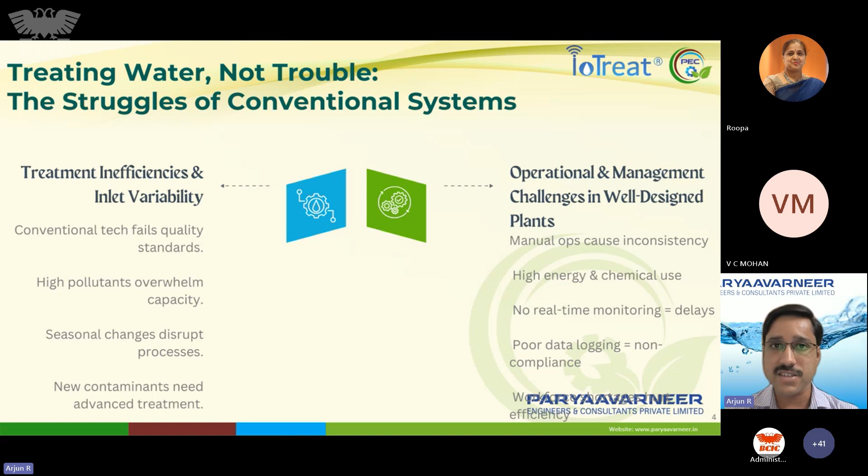So we have a lot of advanced water and wastewater treatment technologies available in the market, which are already well proven and established in many industries. There are a lot of industries already implementing most of these advanced treatment technologies, but there is a very big scope for plenty of other industries to join this as well.

Some of the technologies available are membrane-based treatment, with respect to reverse osmosis, ultrafiltration, nanofiltration, RO, MBR - all these options are available under membrane treatment systems. We have advanced oxidation processes, in which ozonation, UV peroxide, and Fenton process are available. ZLD technology, which is a very hot topic today, as a lot of industries or industrial regions are compelled to achieve zero liquid discharge from their premises. There are many proven ZLD technologies available, like MEE, MVR, LTE, or TVR. We also have application-oriented technologies, like seawater reverse osmosis, which is very much essential for coastal industrial belts like Chennai.

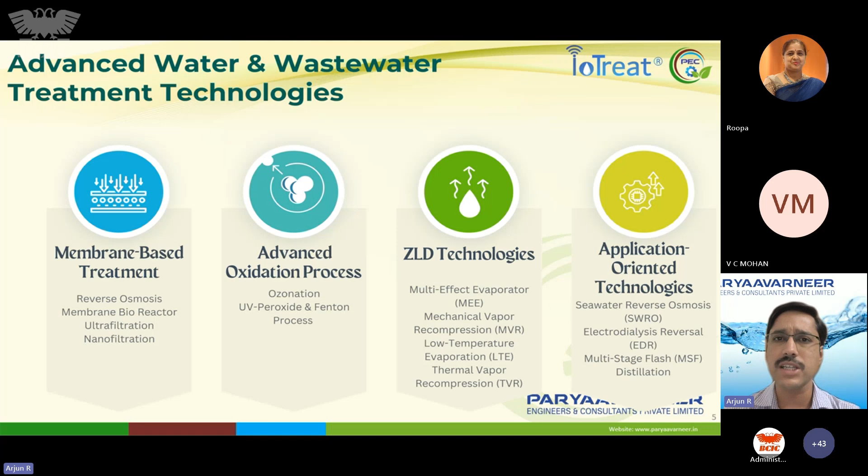So Chennai is dependent a lot on seawater desalination technology, electrodialysis reversal, or multi-stage flash distillation. These are some of the advanced water and wastewater treatment technologies available in the market, proven and running successfully in many places, which can be implemented elsewhere to achieve better results and conservation of water. So we will go through some of these technologies in the coming slides.

So this is the comparison of membrane technology. We'll start with membrane technology, in which different types are available: microfiltration, ultrafiltration, nanofiltration, reverse osmosis. Each membrane process is used for different purposes - it's not that one membrane technology can meet all requirements in any place or industry. So we have to carefully choose what we require, or what output we expect from this treatment. Once we have this clarity about the input we are giving to these membrane treatment systems, we will be able to get very high efficiency and output from these membrane technologies.

So membrane treatment is a physical separation system. There is no reaction that happens, and there is no biological process in the membrane. It's purely a physical filtration system, which happens because of separation of solids based on pore size - I will explain this. With respect to membrane processes, each one requires a different level of pressure or permeability, depending on the membrane type, membrane MOC, and the water being used.

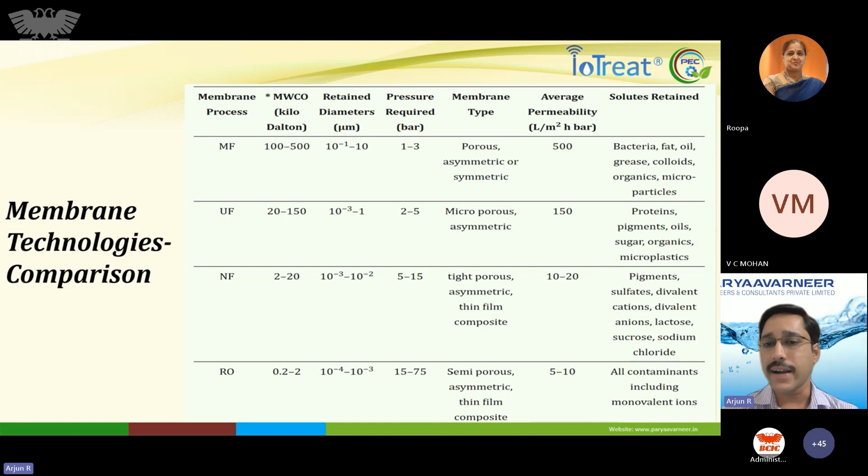So this is a particle separation chart you can go through. Microfiltration, UF, NF, and RO are all designed for particular particle separation - it's not that any of these membrane systems can filter any particle mentioned here. Under microfiltration, it can remove paint pigment, human hair, or anything more than 5 micron easily. When we come to ultrafiltration, it can remove virus, bacteria, silica to some extent, and carbon black. UF is generally designed when we want good water, to purify water by removing suspended solids present in it. Then comes nanofiltration, which is used for removal of certain specific types of ions that we require.

For example, if you want to remove only calcium from the water and don't want to remove any other ion, then we can use nanofiltration. Nanofiltration is generally used when we have to selectively remove some ion from the water.

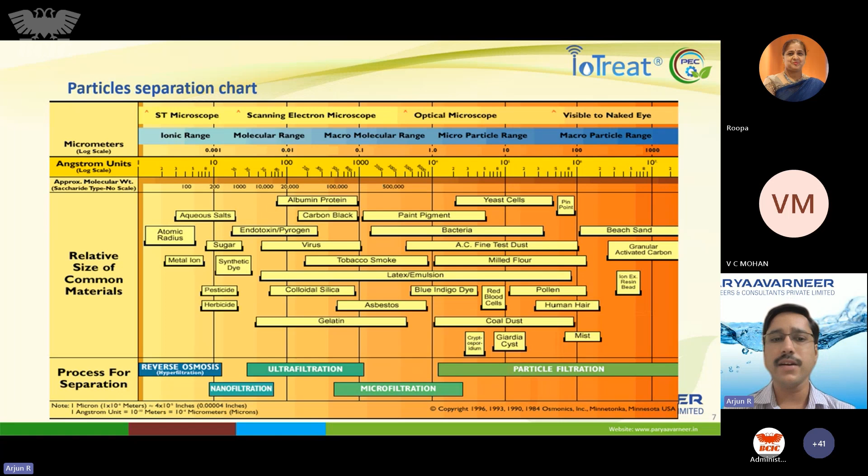Reverse osmosis is used to remove the dissolved solids present in the water. So most of the aqueous salts, metal ions, or all these things can be removed through reverse osmosis. Reverse osmosis is one of the highest levels of membrane filtration currently available in the market, and it is being widely used.

This chart can give a very clear understanding about which membrane filtration system can remove what type of material from the water. You can see here microfiltration, up to some extent, can remove bacteria and suspended solids.

Ultrafiltration for sure can remove virus, bacteria, and suspended solids, but it will allow monovalent or multivalent ions to pass through its membranes, because these ions' particle size is less than the pore size of the filtration. Generally, the ultrafiltration membrane will have a pore size of 0.01 micron, but these ions' particle size will be even less than that.

In nanofiltration, based on the membrane pore size, the type of membrane we are using, and the ion involved, we can remove some multivalent ions from the water, and some will still pass through. Monovalent ions cannot be removed through nanofiltration, but in reverse osmosis we can remove all these things—monovalent or multivalent ions. So all these can be completely removed through the reverse osmosis system.

Considering that suspended solids can technically be removed by reverse osmosis, we cannot feed suspended solids directly into the RO system. If we do, the pores of the reverse osmosis membrane will get blocked. So we have to ensure the water first passes through ultrafiltration and then is sent to reverse osmosis, to ensure a long life of the RO membranes. That is the general practice used in all places.

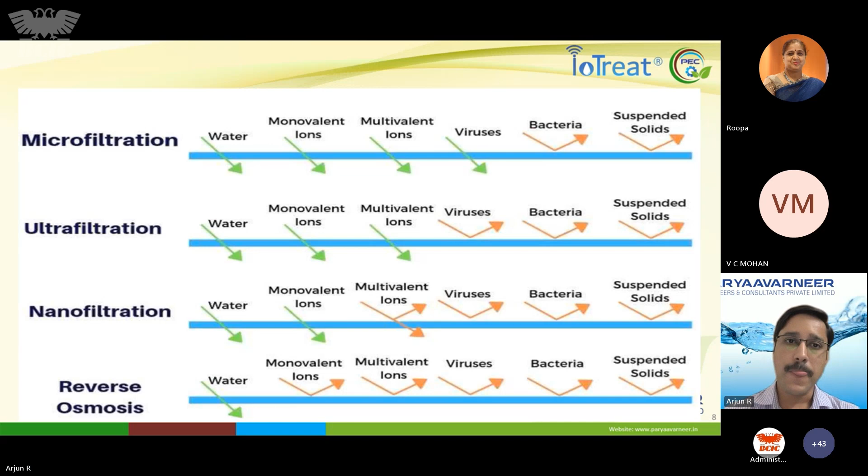Now we will dwell a little deeper into the membrane bioreactor. Membrane bioreactor is one of the advanced technologies available for sewage treatment and effluent treatment. Whichever water contains organic pollutants, we can use membrane bioreactor to remove those pollutants from the water.

This is the general flowchart of the membrane bioreactor, in which there will be a screening system at the initial stages, then oil and grease removal. Then it comes to the equalization tank, where the incoming water is mixed for 8 hours to achieve equalized water characteristics. Then it is fed to the anoxic tank and aeration tank, where the important biological degradation happens, and then it is fed to the membrane tank.

As I said earlier, the membrane used in membrane bioreactor is also a physical separation system. Even though a sewage treatment plant or effluent treatment plant contains chemical and biological treatment units, like flash mixers, clarifiers, or the anoxic and aeration tanks shown here, which are biological, the membrane tank itself has no biological reaction happening in it.

The membrane tank contains only membranes used for separation of solids from the water. In conventional treatment systems, we generally use clarifiers or settling tanks to separate water or MLSS from the water coming from the aeration tank. But in the membrane tank, we use membranes equivalent to ultrafiltration membrane quality, including pore size.

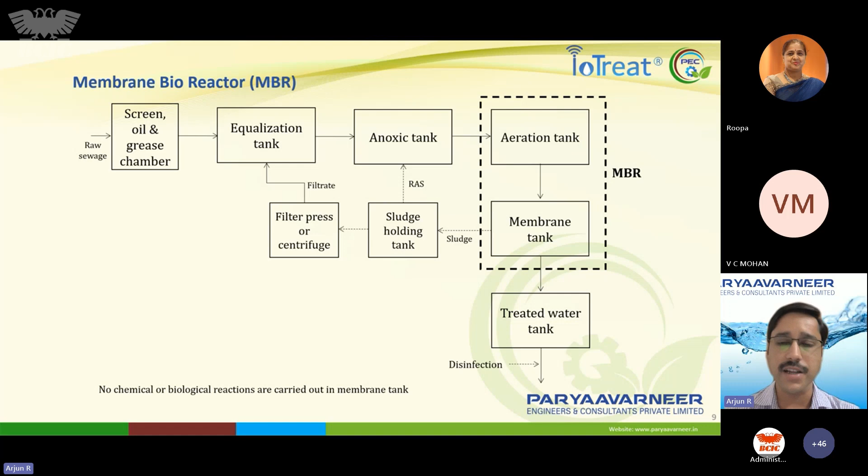So this membrane bioreactor is a combination of activated sludge process and membrane filtration. And instead of settling the MLSS, the membrane is used to separate the water and solids in the sewage. So hence we get a very good quality of treated water. And MLSS is generally maintained in the range of 8,000 to 12,000.

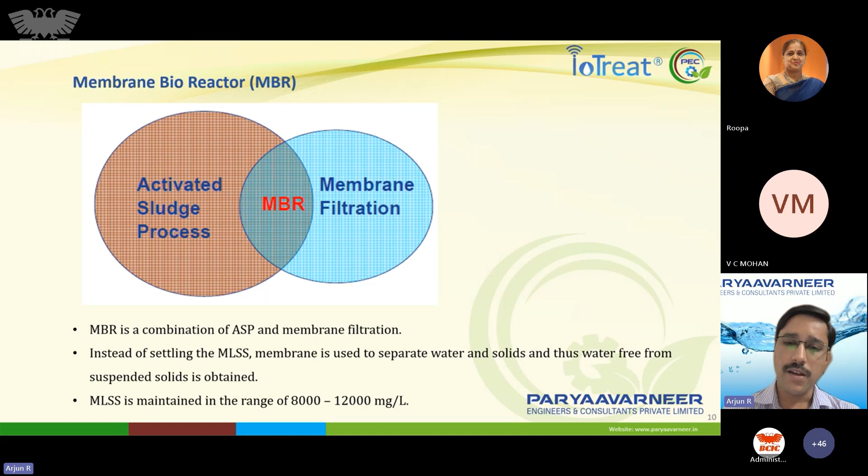That is about this. You can see here a membrane surface against which the water containing solids and water is pushed through, and because of the pore size of the membrane, the solids remain on the surface of the membrane, and only water passes through. This is because it is a semi-permeable membrane which allows the water to pass through, but not the solids which are more than the pore size.

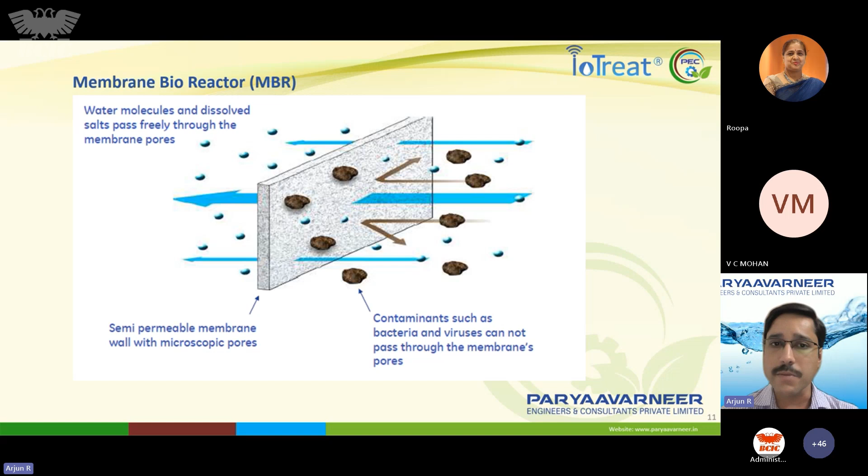And these solids are recycled back or removed from the system as per the requirement. So these membrane bioreactor systems can even remove bacteria and viruses. So that is also another advantage. It will be free from contaminants, like virus, bacteria, any type of virus and bacteria also. All these things can be removed in this membrane.

So this is how a typical membrane bioreactor module would look like. There are two types of membrane bioreactor systems that come with it. One is flat sheet and hollow fiber membrane. This is a hollow fiber membrane reactor module that we are showing here. The left side picture is of the module and the right side picture is of the cassette, which will be directly immersed in the membrane tank, and the permeate is sucked out from the system using the permeate pump.

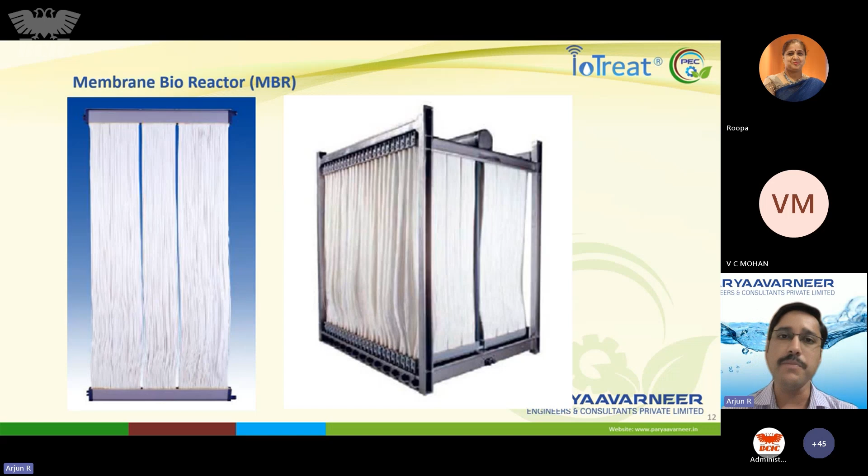And this is the treated water quality that we can get from the MBR treatment plant. It may be an STP or an ETP. This quality of treated water is for sure that we can get, provided the design is done in a proper way. This will be having BOD of even less than 5 or less than 10, which meets the legal requirement and also the reuse requirements in most of the industries. And even COD will be less than 30 or less than 50. TSS will be less than 1 or even sometimes not detectable also. Turbidity also less than 1. So we get very pure water from this MBR system.

This MBR system is very helpful when you want to reuse the water. If you want to use the water only for gardening purpose, then we may recommend some other technologies. But considering if you want to reuse the water for your process, or even for some other purpose, if you want to further treat it with RO and use it for some other purposes, then MBR is the most suitable option that you can use.

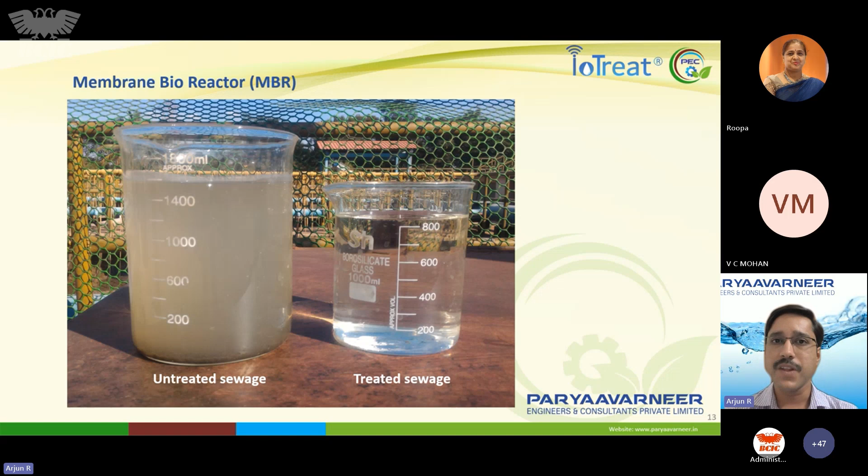And even when we use this MBR system, it will simplify your process. For example, if you have a conventional treatment plant which has an aeration tank, settling tank, sand filter, carbon filter, this MBR tank coupled with an aeration tank can replace this entire treatment system. So that is another big advantage that MBR will have.

So some of the major advantages of the MBR system is you get a very high quality of treated water from this, with BOD less than 5 and COD less than 20. Treated water can be even directly used for cooling towers, treated through RO, and in some foreign countries, they are even using it for drinking also after good quality disinfection. There is no odour generation, and it requires very less area compared to all other existing technologies for sewage treatment or effluent treatment.

But yes, it comes with some disadvantages if we consider it like that. It's a high installation and operating cost is required. It requires skilled manpower for operation and maintenance, and we have to change the membranes periodically, which is not there in some other conventional treatment technologies.

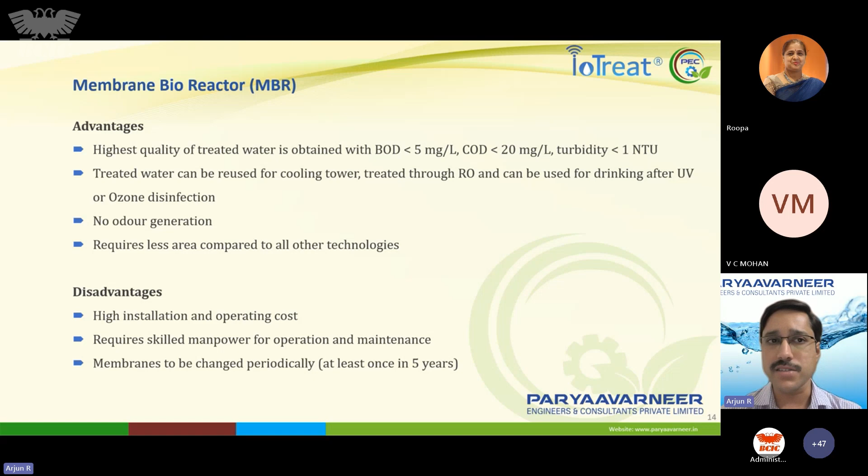To get a very high quality of treated water and to reuse it, it is worth going with this technology, considering water as a scarce resource, and considering that water availability in a lot of industrial areas is difficult to get, especially in summer seasons. Even the government cannot supply water, since they have to first supply it for drinking purposes. So this technology helps reuse most of your wastewater, whether sewage or effluent, for your process. This is about MBR, generally used for sewage and effluent treatment.

What can be done is, if you already have a conventional treatment system, like ASP, SBR, or MBBR, UF can be integrated to get treated water quality almost equivalent to MBR. I don't say it will be exactly equivalent, but very near to MBR quality can be achieved from the UF system. This can be done when you already have a treatment system but no space to expand, yet you want good quality treated water, and MBR cannot be installed due to constraints. So this is one of the better solutions to look into.

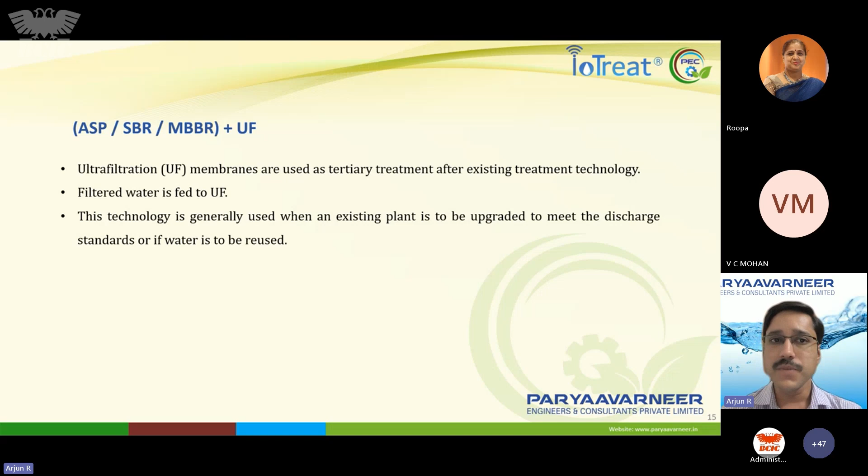Its advantages are that upgradation can be done without any new construction and without much change in the existing treatment scheme - that is a major advantage. Cost of installation is not as high as MBR, but water quality will be almost equivalent to MBR. This UF skid will also be available in plug and play type, so you don't have to go for major engineering changes in your treatment plant. You can just have your UF skid installed and directly feed your conventional treatment plant's treated water to UF, provided it meets the inlet water quality requirements.

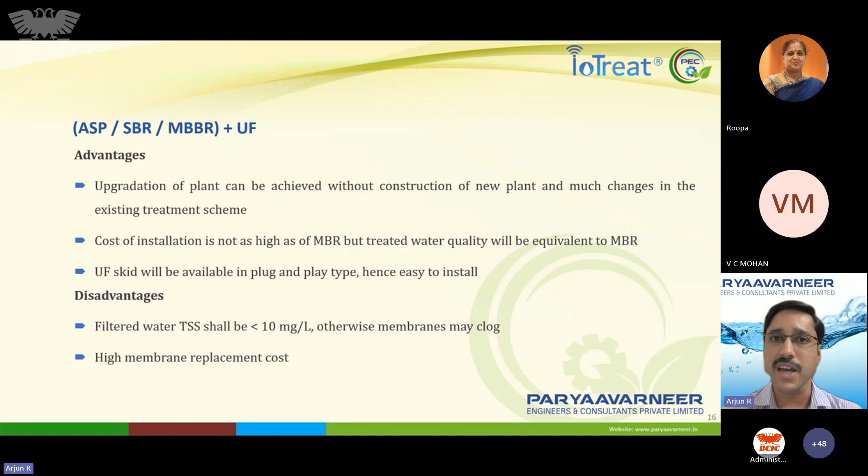The drawbacks are: the feed water we are feeding to the UF should have TSS less than 10 milligrams per liter, otherwise the membrane can clog very frequently. This is because UF is a pressurized system while MBR is a submerged system, and submerged systems can handle more solids compared to pressurized systems. Hence, in pressurized systems we have to maintain less solids in the feed water. Also, there will be membrane replacement cost equivalent to MBR membrane replacement cost. So this is the drawback.

Now we'll come to reverse osmosis, used for desalination and industrial processes. We might already know reverse osmosis. Osmosis is a forward treatment process where pure water and dissolved solids get separated because of osmotic pressure through a semi-permeable membrane. But what happens in reverse osmosis is, for a solution already containing dissolved solids, we apply pressure so that only water passes through the semi-permeable membrane, and the dissolved solids get separated from the water. That is the reverse osmosis concept.

This reverse osmosis has played a very vital role in water conservation. Wherever we get treated water with high TDS, which cannot be directly used for industrial processes or reuse in cooling towers, boilers, or chillers, we can have a reverse osmosis system from which we get up to 80 to 90% recovery of water, which can be directly fed to the industrial process. So this is a very important technology used for water conservation and reuse in industries.

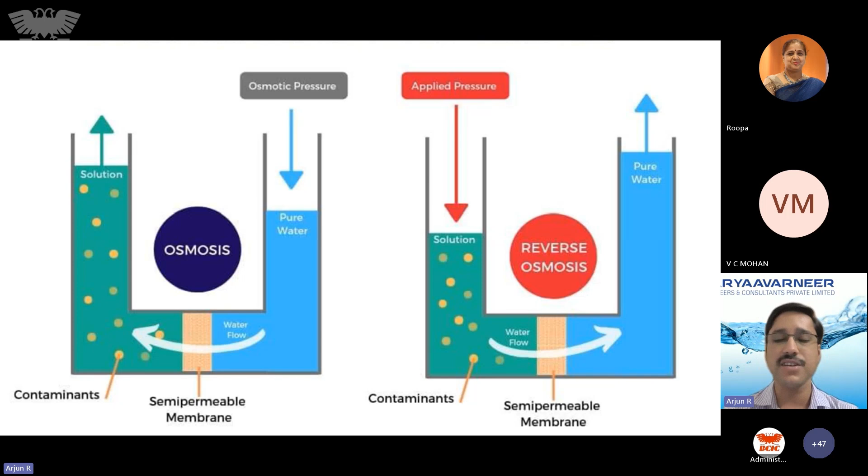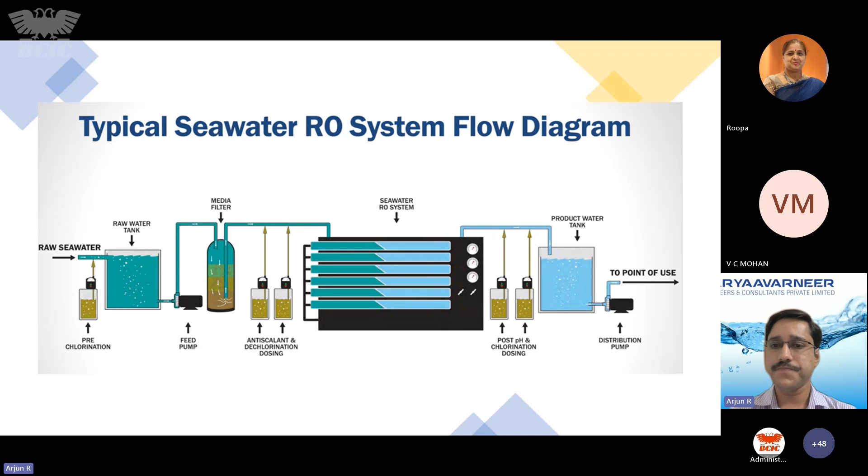So in seawater reverse osmosis, there will be a pre-treatment in which there will be filtration through sand or carbon filters. Then there will be chlorination and dechlorination, adding of chemicals like antiscalants, and cartridge filters.

Then it is fed to reverse osmosis, where there will be an RO membrane, through which it is passed using the high pressure pump, which helps to get more recovery and less quantity of reject. And even the permeate will be having lesser TDS, which helps to reuse the water.

And in post treatment, we'll be doing the degasifiers or pH adjustments depending on the requirement, and it can be directly reused. So we can even convert seawater having around 50,000 or 60,000 TDS to TDS less than 100 or 200 using the RO system.

So that is the advantage with RO systems, which helps to reduce the freshwater consumption and for reuse and recycling of the treated water.

In a lot of industries where you want to achieve ZLD, RO is a very important part, where the treated effluent is passed through UF and RO, and then it is fed to the ZLD. The RO reject is fed to the ZLD, because ZLD operation is a very costly affair.

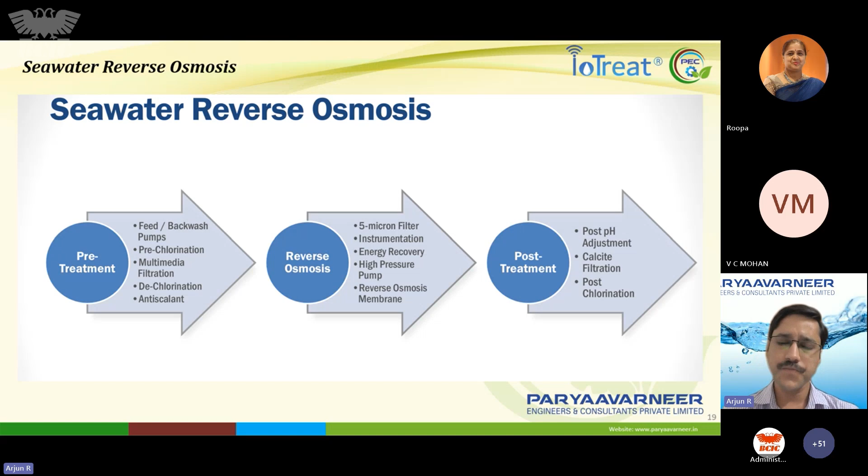So as much as we can reduce the ZLD sizing, it will be helpful to reduce the cost of operation and even the capex cost. Reverse osmosis plays a very important role in that, where we can reduce the reject quantity that is being fed to the evaporator system and get more recovery of water.

So till now we have talked about the advanced technologies that are there for water and wastewater treatment. Even with this advanced treatment, one important point is if we have a manual operation system, or a very unskilled team to operate the plant, then these plants are going to fail. So automation is very, very important nowadays, considering the lack of availability of skilled manpower to operate these plants, and hesitation among some people to work in treatment plants like effluent treatment plants or sewage treatment plants. We can come out of those problems with automation.

Before that, I would like to bring to your notice one of the key statistics in India. With respect to sewage generation, only 22% of the sewage that is generated in India is being treated, which means around 78% of sewage is not being treated currently in India. This data is taken from the CPCB report itself.

And out of the 22% of sewage being treated in the STPs, only 39% of the STPs are giving output meeting the regulatory requirement, and the rest of the 61% is not at all meeting the requirement of BOD, COD, and many other parameters. So that is the current state of treatment plants.

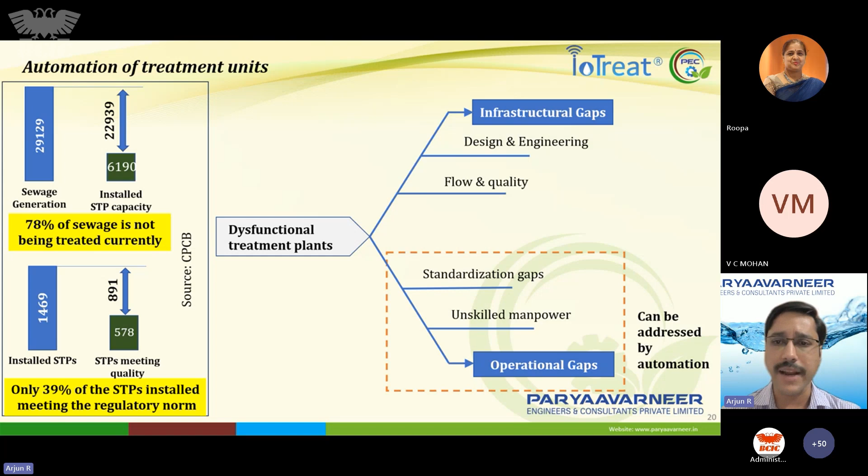So automation with digital twin technology, this is one important part. There may be treatment plants which already have PLC and SCADA systems running in automation mode. But generally these treatment plants will be very much away from habitation, or in industries they will generally be at some other place where there is no people movement.

Considering that, it is very unfortunate sometimes that the treatment plants are not monitored properly. It is left to the operators who operate the plant, and nobody will really be bothered about it. This is because there may not be any skilled team to take over the operations, and one more thing is there is no data availability at hand. We have to depend on someone else to understand the plant performance.

But using the digital twin technology being shown on screen, we can create a replica of the treatment plant at any place in the cloud, with which we can understand the entire plant operation with just one single click. So we need not depend on any person, operator, or supervisor to understand the plant performance. In a single screen, you will understand the entire plant with respect to quality, quantity, tank levels, and status of treatment. All these things can be understood with just one single click. That is the advantage of automation when clubbed with digital twin technology.

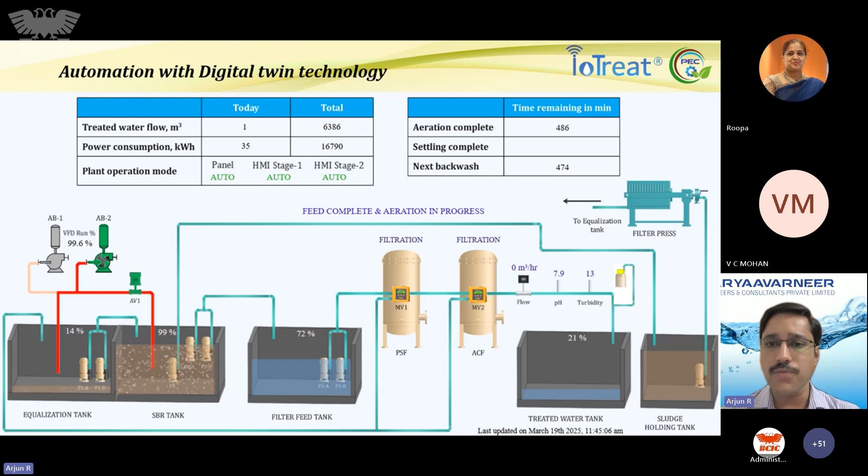So what we get as an advantage from automation of treatment plants is with respect to quality of water, which is a very important point for the reuse of water. It always meets legal and reuse requirements. Once the treated water is consistent in quality, those who want to reuse it will be very happy to do so. Otherwise they will be under some fear that if treated water quality is bad, it will affect their process, whether it's a boiler, chiller, cooling tower, or industrial process. So it is very important to give confidence to the person using the water that treated water quality will always meet reuse and legal requirements.

So that is one important thing, automation helps achieve that. It can even reduce manpower by 30 to 80% depending on plant technology, capacity, and layout of the plant. We can even achieve energy consumption reduction of 20 to 30%, and reduce manpower cost by 30 to 60% from automation. Because automation with digital twin will eliminate the need for one person to monitor the plant also.

When we have automation with only HMI or SCADA, again we have to have one person to monitor the plant because we don't get any alerts from the plant. We don't understand what is happening in the plant unless we visit and look at the SCADA system or HMI. But when we have digital twin technology, we can have all these alerts generated, assuming we want an alert when the tank level is high or when treated water quality crosses some limits. So all these things are possible when automation is clubbed with IoT and digital twin technology.

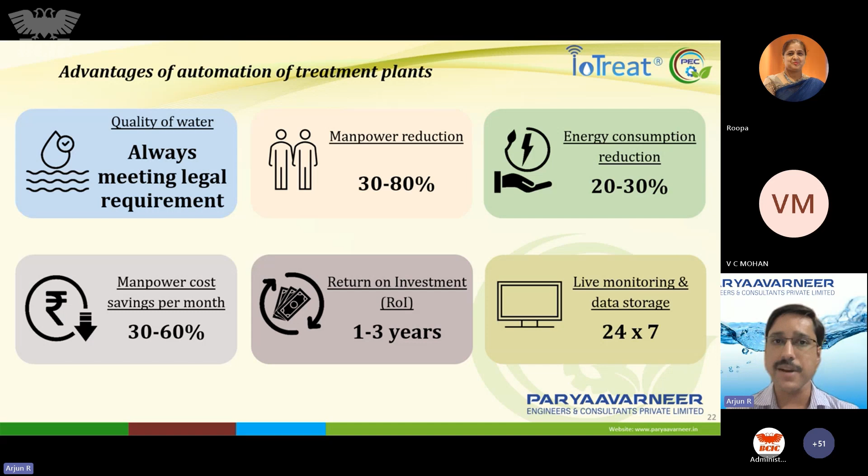So now I will be coming to the role of IoT, AI, and ML in water treatment and management. Till now we talked about the advanced technologies and automation that are there to operate the plant. But the world is moving towards AI and ML. AI and ML is being implemented in almost all places. But the environment field, and especially the water and wastewater treatment field, is something where technologies get implemented in a very delayed manner.

But the good thing is that now that trend is changing, and a lot of companies, a lot of players, are showing interest in adopting new technologies into their systems, like using IoT or AI and ML in the environment, and especially in water treatment and management.

So what is currently happening in the market, where IoT, AI, and ML are playing a very important role in enhancing efficiency, reducing the cost of operation, and enabling remote operation capabilities? I will just throw some light on that.

So, first thing is with respect to water and wastewater treatment plant operation. As I said, the new treatment plants are coming with automation and integrated with IoT and ML. So IoT plays a very important role in creating a digital twin of the treatment plant, with which we can even operate the treatment plants remotely.

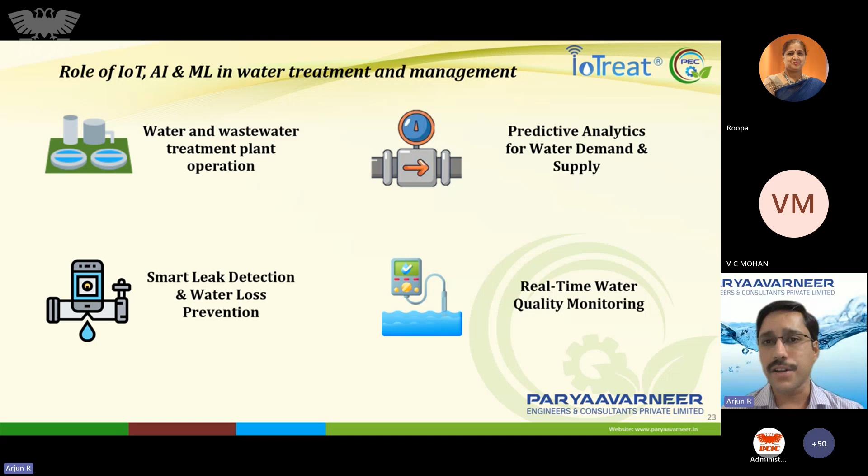The first case study is about water and wastewater treatment plant operation. I'm explaining a case study of a co-work space in Bangalore which adopted an IoT-based sewage treatment plant operation system into their existing plant. Earlier, this treatment plant was operated manually with people present in every shift, but they were still not able to reuse the water because it did not meet quality requirements.

After this IoT-based system was implemented in their STP, their freshwater consumption got reduced by 30% because they were able to reuse the treated water for flushing and gardening. Their cost of operation reduced by 50% because there was no need for manpower to be present at the site 24/7. People could be there for just 4 or 8 hours, reducing the requirement of 2 additional manpower, which significantly reduced the cost of operation.

Generally, treatment plants, whether effluent or sewage treatment plants, are not operated consistently by their owners for two reasons. One is that it is considered very operationally intensive, requiring high energy consumption and high costs for salaries and other things. The second reason is the belief that we cannot get consistent quality of treated water, so owners think: if we cannot get it consistently, why operate?

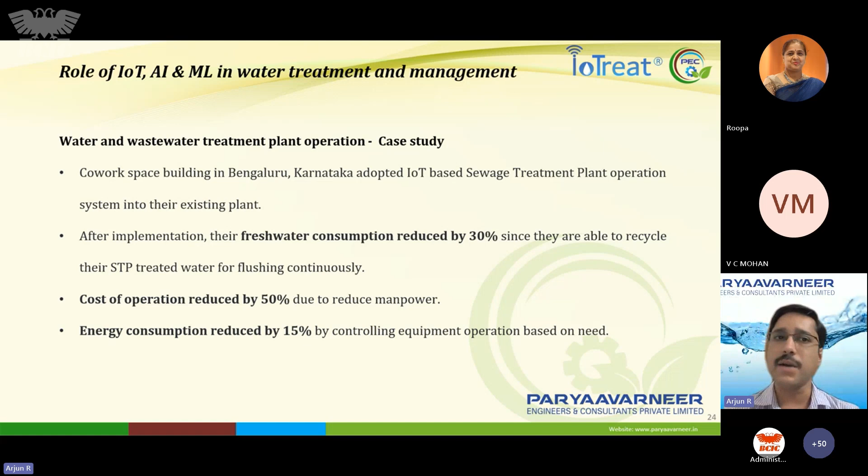So ML and data analytics helps to analyze that data and take further actions based on the requirement and to optimize the plant. So this is one of the case studies of where IoT and ML is used for water and wastewater treatment plant operation.

Then the second case study is with respect to predictive analysis of water demand and supply. As I said earlier, the utility having to know water demand at various periods of time, within a day or within a month, will help the utilities to supply the water in a consistent manner. Even in industrial units, where government bodies like KIADB or BWSSB are supplying the water, it is very important for them to understand what is the water demand, based on which they can be ready for the supply.

But how to predict this demand and be ready for supply? That's a very big question, because we will be having the data of the number of people or number of industries that are using the water. But that can vary depending on a lot of factors - it may be seasonal variations, it may be rainfall, it may be temperature. So all these things play a very important role.

But once we have very good data about the historical water consumption of that region, we can use ML models. There are different ML models like LSTM or BiLSTM, MLPs, which can be used to analyze the water demand and supply requirements. This was done in Greater Melbourne, Australia.

They had historical daily water supply and demand data of almost 20 years. That's very good data, because ML and AI works very well with more data. So once we have a good number of data points to analyze, it will give us very efficient and implementable results. This historical daily water supply and demand data of around 20 years was available, along with climatic variables such as rainfall, maximum temperature, and season. So all this data was available.

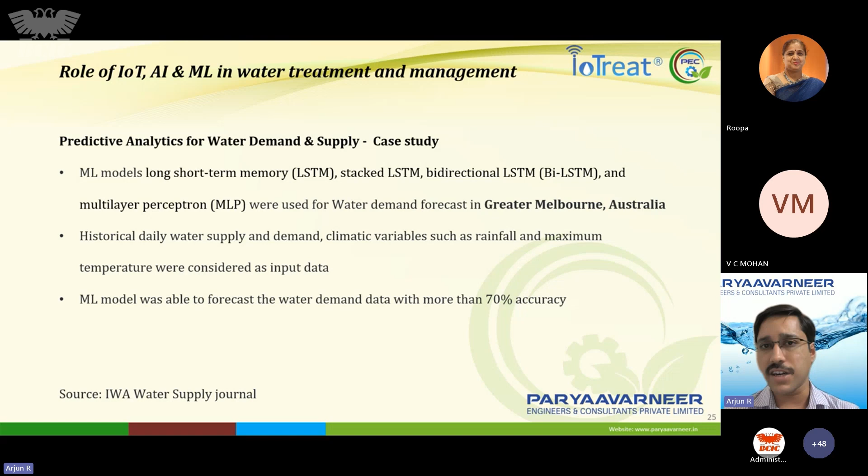So this is one of the papers that is published in the IWA Water Supply Journal. This is openly available on the internet also. So this is another key place where ML is playing a very important role in water treatment and management.

So with respect to the use of technology in the treatment plant, what are the current challenges and what is the road ahead, and how can we be prepared? It may be a small industry, a big industry, or a utility system - how can we be prepared for imparting these technologies into our systems and improve our efficiency?

So the current challenges that exist to implement these advanced technologies - one is data challenges. As I said, with very limited data availability, it is not possible to prepare any model in terms of AI or ML. So we need to have more and more data available. The more historical data available, the better the model will be and the better its efficiency will be.

Data challenge is one thing. So what we can do is first collect the data with respect to the analytics we want to achieve in our systems. It may be water consumption data, or the water consumption requirement in each process, treatment plant reuse capability, treated water reuse patterns. So we can have all this data. If we don't have it, we can start gathering it using advanced technologies like IoT, AI, or ML.

Another important thing is data quality and consistency. When we build these AI or ML models, it is very important that this data is in a very consistent manner, and its quality has to be good. Quality of the data means one is its accuracy, that is very important, and second is its consistency.

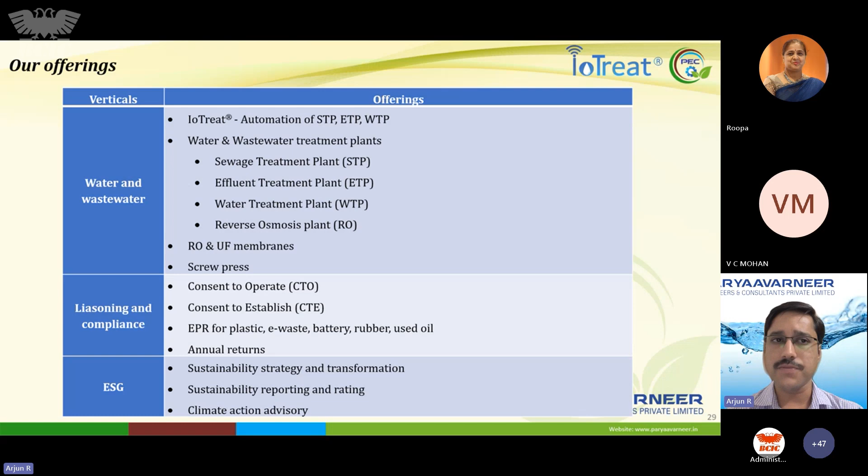We offer our services in different verticals: water and wastewater treatment, liaisoning and compliance, and ESG. Automation is also one of our key focus areas in water and wastewater treatment. These are the three verticals, and these are the offerings we do in our current verticals.

We have our presence across Karnataka, and we are expanding to southern India also. If you have any requirements, you can contact us. Thank you.

Thank you very much, Arjun. For me, the entire presentation was almost 1 hour, and it was like a storyline. I can clearly see that whatever you presented is coming from your experience working with industries and giving them solutions in water and wastewater management, because you started with the various membrane filtration systems, which came as tertiary treatment and improved the quality of treated water, meeting the stringent standards set by the Pollution Control Board.